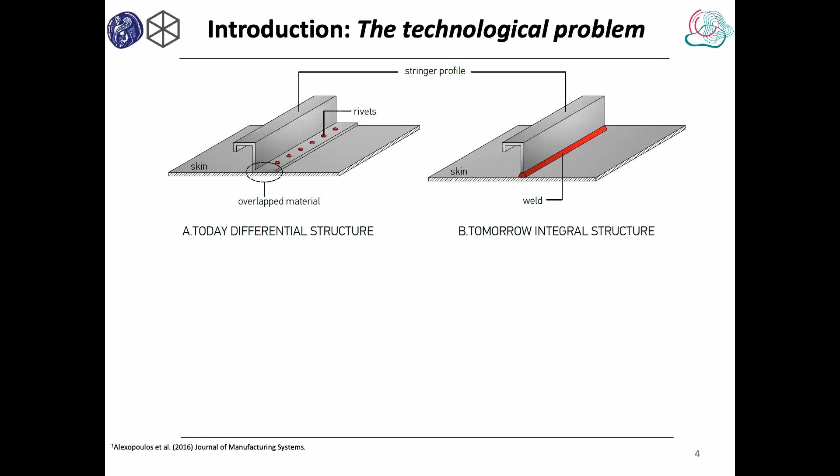Here is the typical implementation of riveted connections in an airframe, and here, for example, is a photo showing how the welded structure can look like.

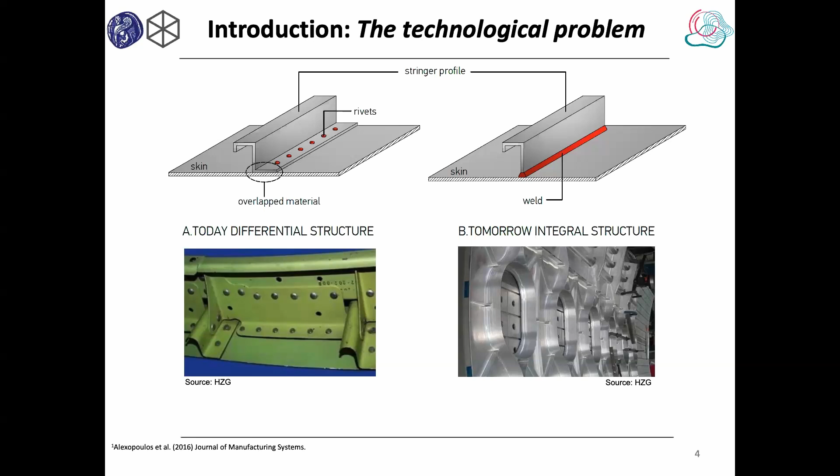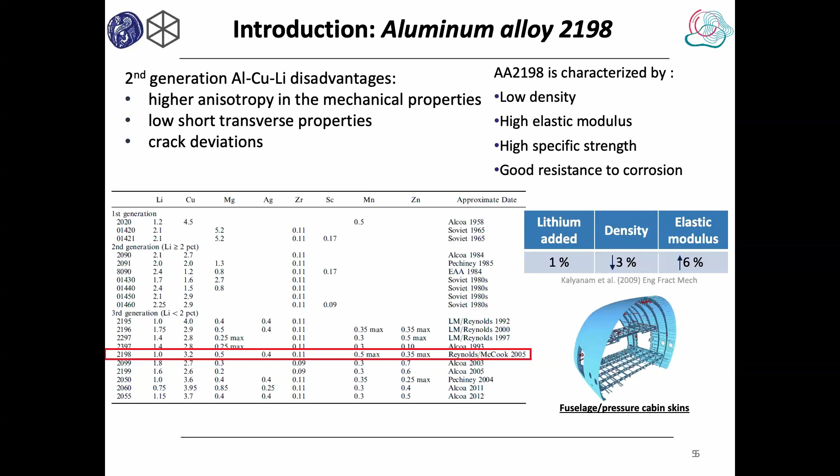Another motivation is to use, instead of state-of-the-art alloys such as 2024 as a skin material and 7075 as a stringer material, innovative materials with further lightweight and improved mechanical properties, such as aluminium lithium alloy. Here is the composition of the newly developed third generation aluminium lithium alloy 2198 - we can further reduce weight and increase, for example, modulus of elasticity and mechanical performance.

Some background on aluminium alloys: they are precipitation hardened alloys, and we can increase or adjust the properties by an appropriate heat treatment. Precipitates can influence dislocation movements, and therefore we can achieve adjusted stress-strain behavior of the material.

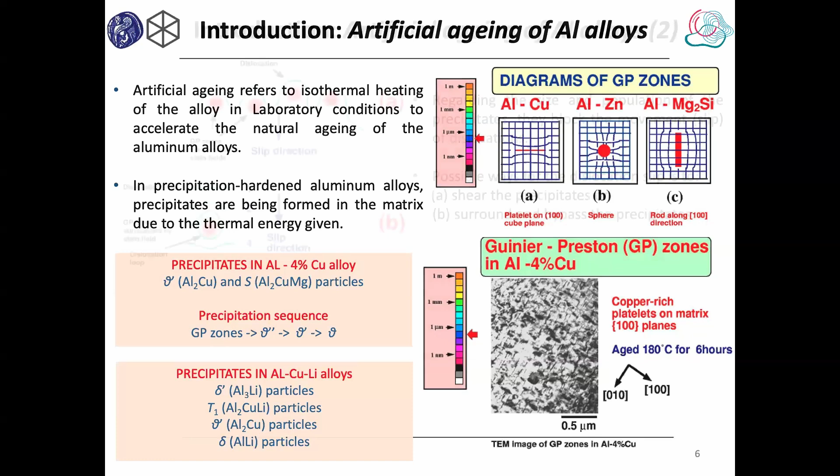Here are the mechanisms - for precipitation hardened alloys, we need to optimize the heat treatment. We have a competing situation between temperature and time to achieve it. In the first stage, we have improvement of mechanical properties up to the peak aging condition, and afterwards we have decrease. So we have to find a good balance for the heat treatment.

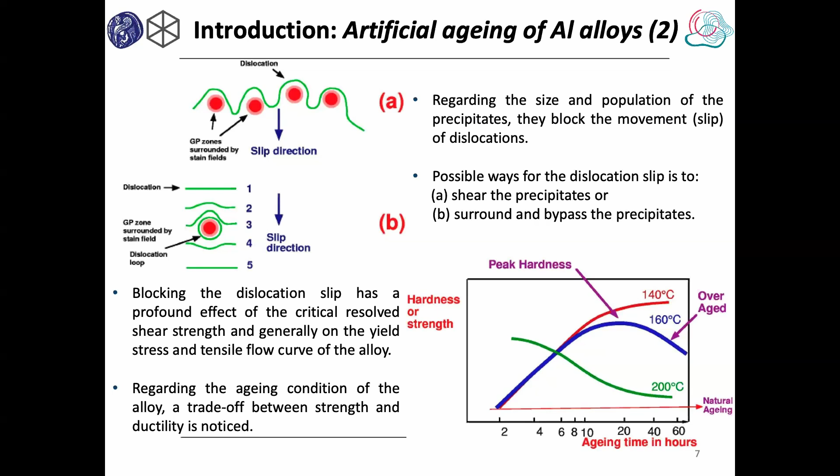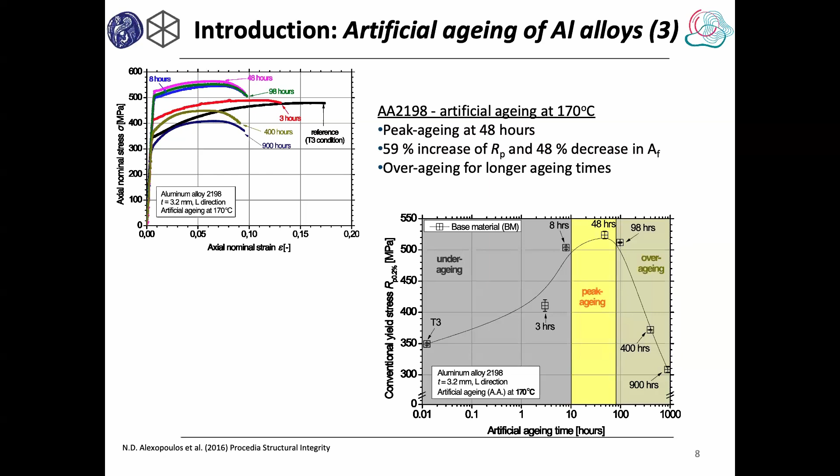This is, for example, how the properties of the base material look like for different heat treatment conditions. We have peak aging, achieving maximum yield strength after 48 hours, for example. After that, we have overaging, which can be achieved by different combinations of time and temperature.

The idea was to find optimal process parameters for welding of this alloy using laser beam welding, and optimum parameters for the post-weld heat treatment, to find a good balance with regard to mechanical properties of the weld.

We investigated welding for material 2198 with two thicknesses, 3.2 and 5 millimeter. During welding, we also investigated the effect of different wires. The typical wire is a high silicon content alloy, 4047. In our work, we also considered a wire with copper as a base alloying element.

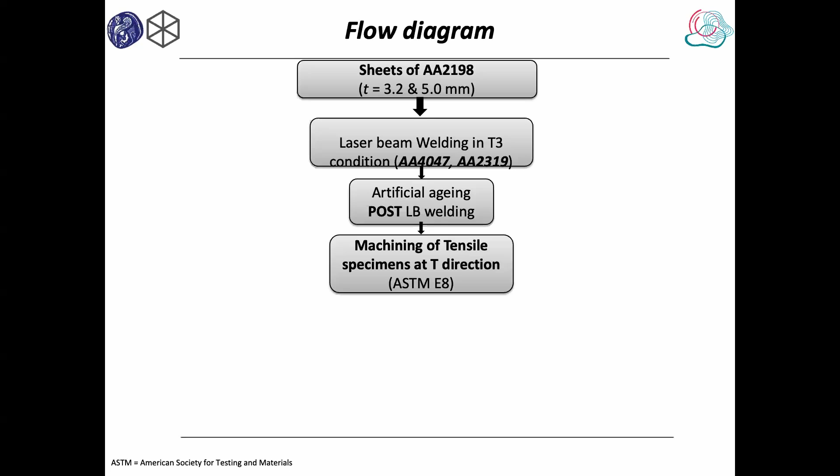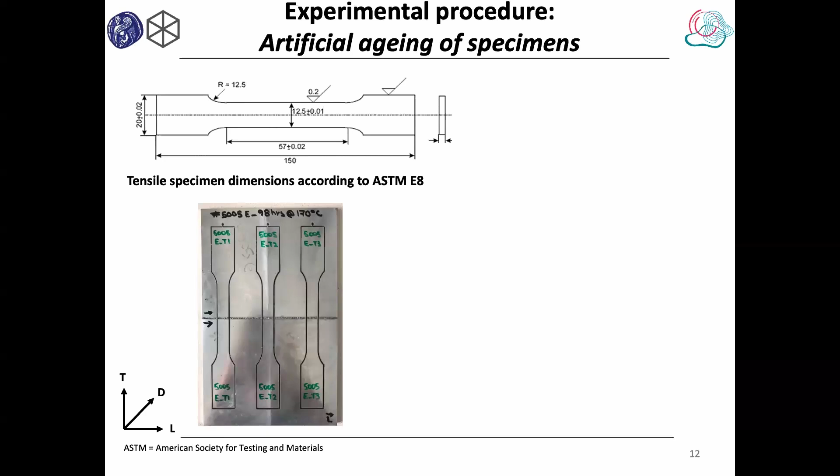We performed optimization with regard to welding, and investigated different heat treatment conditions after welding. Here is the overview: for characterization, we used tensile specimens extracted from the welded sheet in the middle, and performed heat treatment and tensile testing. For heat treatment, we used a typical furnace, performed for different durations between 3 hours and 98 hours.

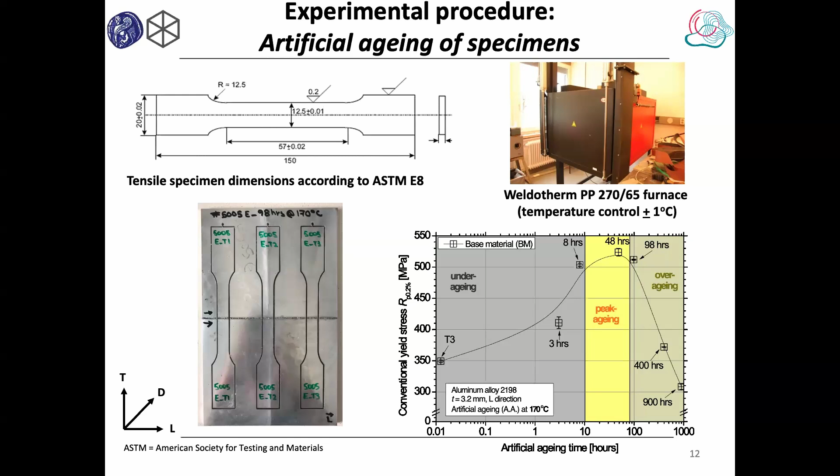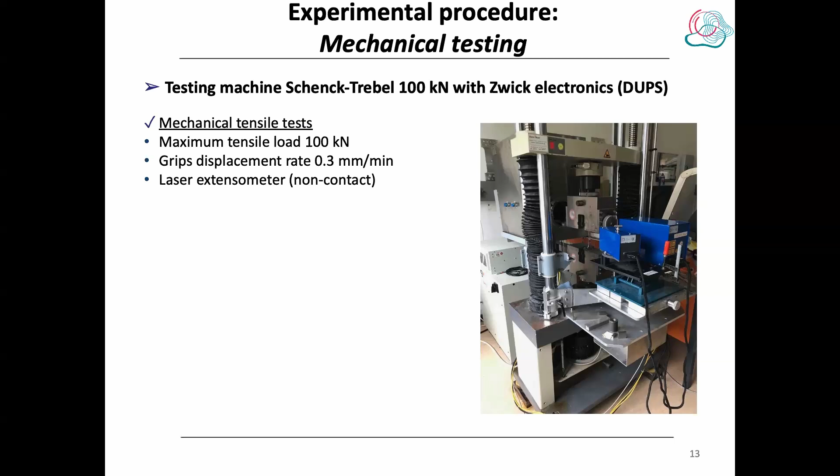For mechanical testing, we performed tensile testing using an electromechanical testing machine - this one in our laboratory from Zwick. And here are the results.

With regard to micro hardness, if we deal with precipitation hardened alloys, we will always have a decrease in hardness because we introduce additional heat input during welding. So the question becomes one of further optimization with regard to post-weld heat treatment - is it possible to increase hardness a little bit after welding?

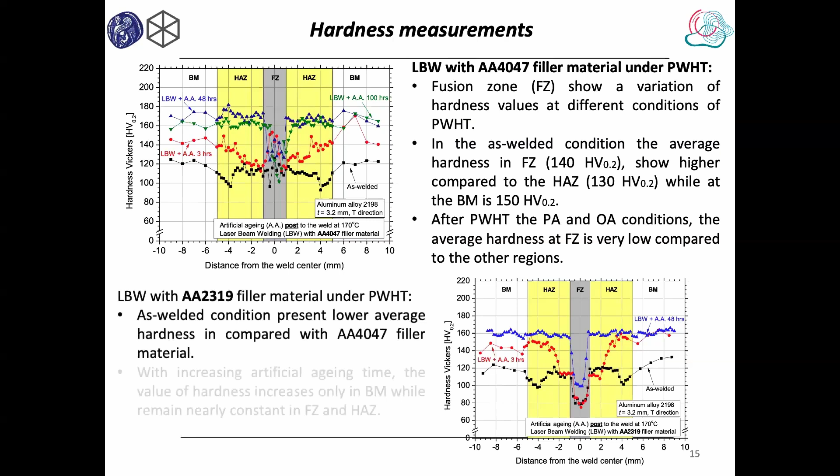We also investigated the effect of post-weld heat treatment on mechanical properties. We see that in the as-welded condition, we have a reduced level of yield strength. If we apply post-weld heat treatment, we can somehow increase the yield strength and mechanical performance of the joint.

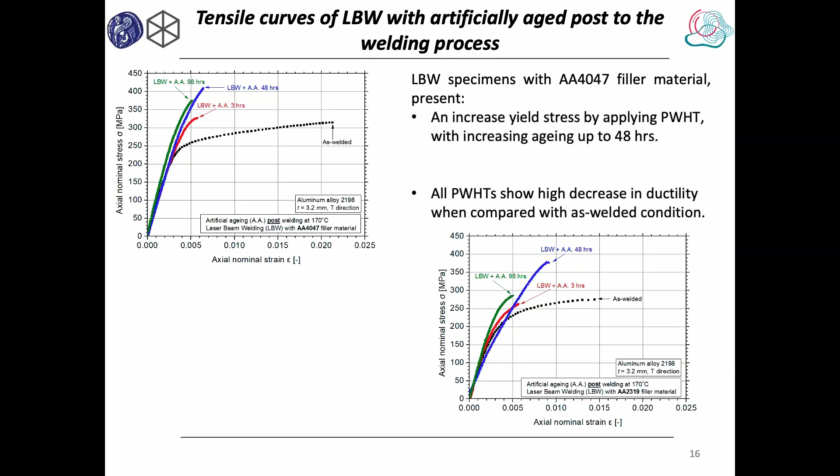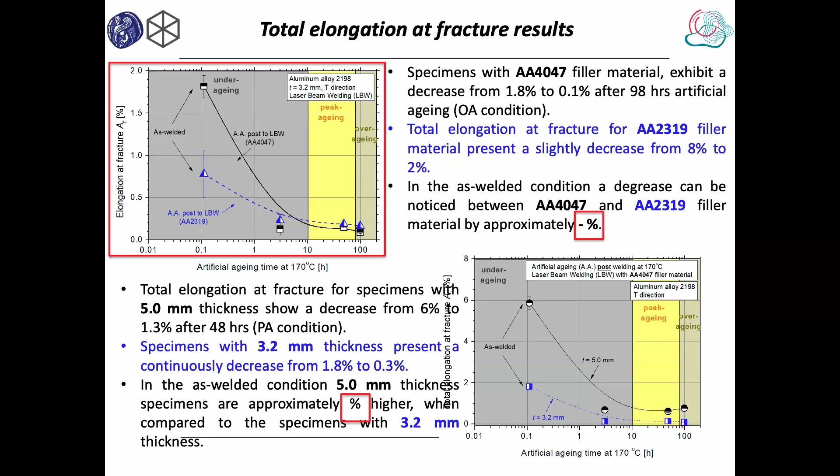We investigated this for two conditions, and Professor Alexopoulos proposed a method for characterization of mechanical performance of welded joints by means of the quality index. The quality index is the energy required to introduce deformation into the specimen up to failure. The higher the energy, the higher the quality of the welded joint.

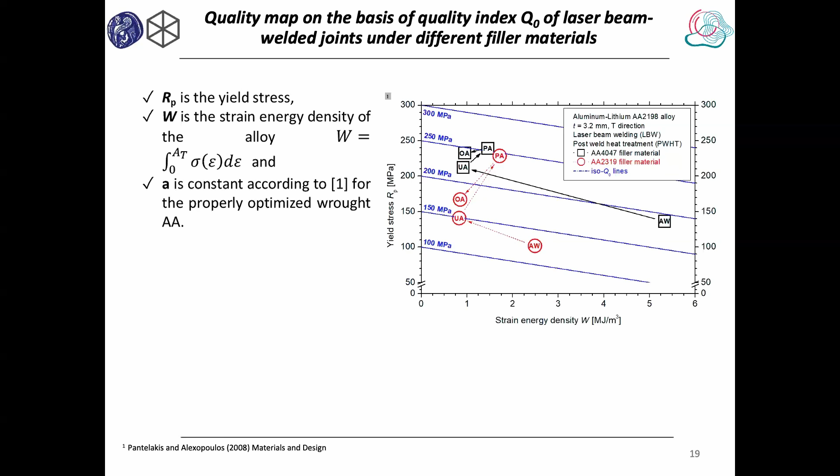The welded joints were also evaluated with regard to quality index to find a good criteria for assessment. You can see that joints with 2319 filler wire show lower quality for all investigated conditions compared to joints welded with the high silicon content wire 4047, because we have higher ductility in that joint.

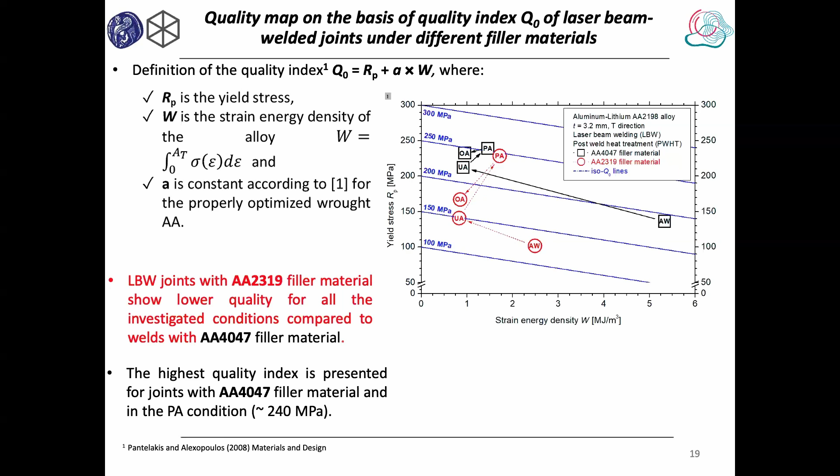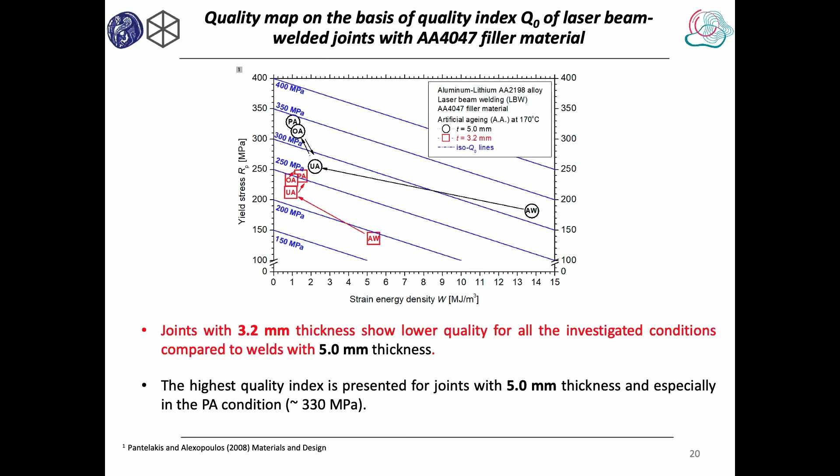Here are the results - we investigated both conditions, welded material of 5 millimeter thickness and 3.2 millimeter thickness. And here are the conclusions of our work.

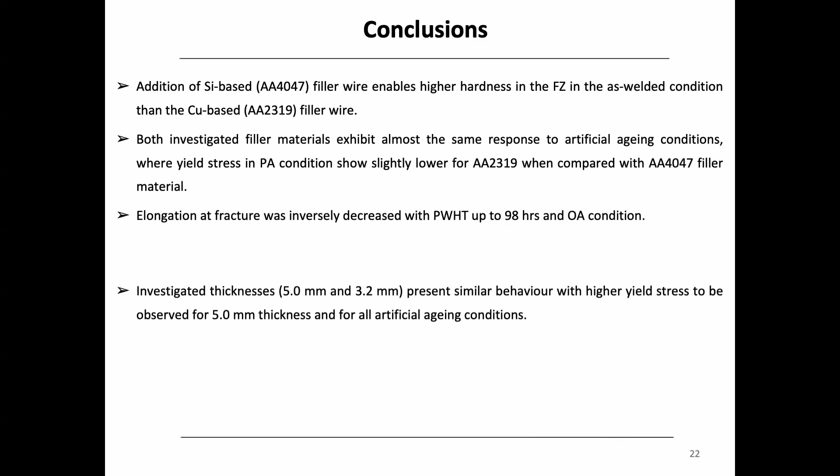Addition of silicon, using the 4047 filler wire, enables higher hardness in the fusion zone in the as-welded condition than the copper-based wire 2319. Both investigated filler materials exhibit almost the same response to artificial aging condition, where yield stress in peak aging conditions shows slightly lower for wire 2319 compared with wire 4047.

Elongation at fracture inversely decreased with post-weld heat treatment up to 98 hours in the overaging condition, for the investigated thicknesses. Both thicknesses present similar behavior, with higher yield stress observed for the 5.0 thickness, for all artificial aging conditions.

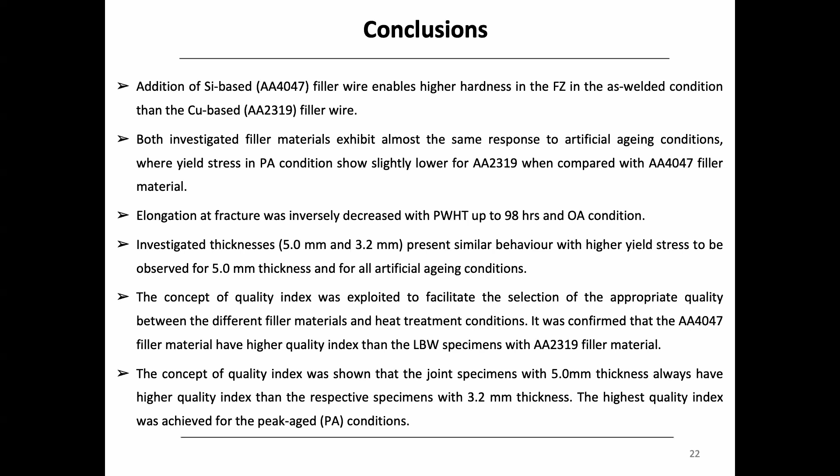The concept of quality index was exploited to characterize and quantify mechanical performance of the welds. It showed that joint specimens with 5 millimeter thickness always have a higher quality index than the respective specimens with 3.2 millimeter thickness. The highest quality index was achieved for the peak aging conditions. Thank you very much for your attention.